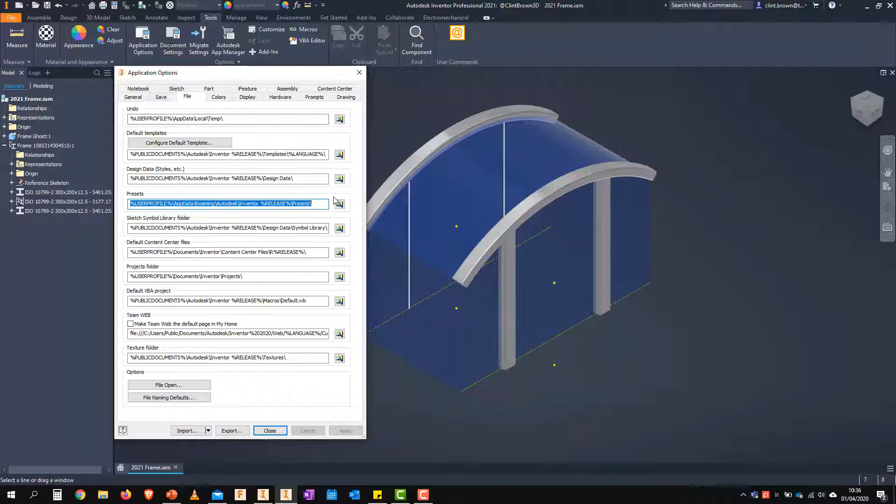The other thing to note while we're in here is that there's some file naming options. In 2021, we have full control over what we want to call our frames in this dialog, and we can even add in additional properties if we'd like to.

So let's jump back into the interface. First, what we can do is choose a frame size, and we can then add that as a preset. We can rename these presets as well. Once that's saved, it's added to our list.

If there's any presets we don't like, we can go to our settings and delete the current one, or whatever we've chosen, and those are removed from the list. We can also rename them. Something I quite like is you can use the property eyedropper to pick on a frame, and that'll load those specific settings. Once we've done that, we can add that to a preset as well.

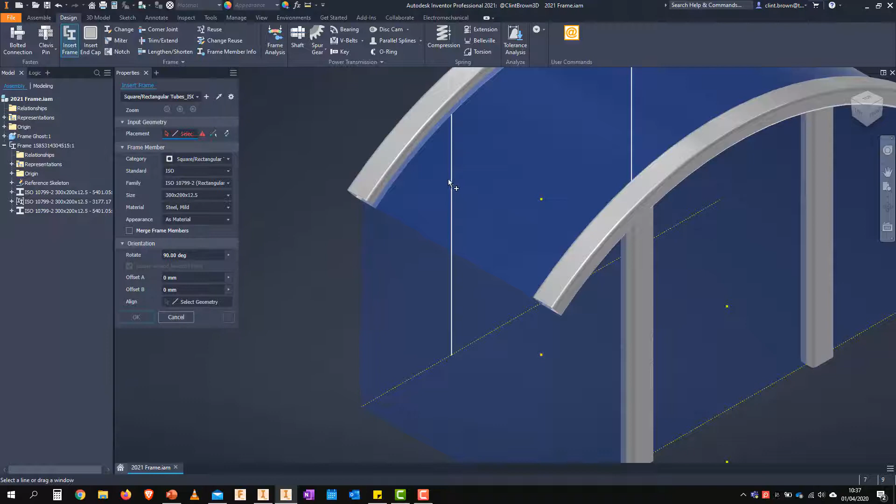So let's look at placing a frame. Click on an edge, and you'll notice that when we mouse over edges now, we actually start seeing the orientation in a little tooltip preview, which is really nice.

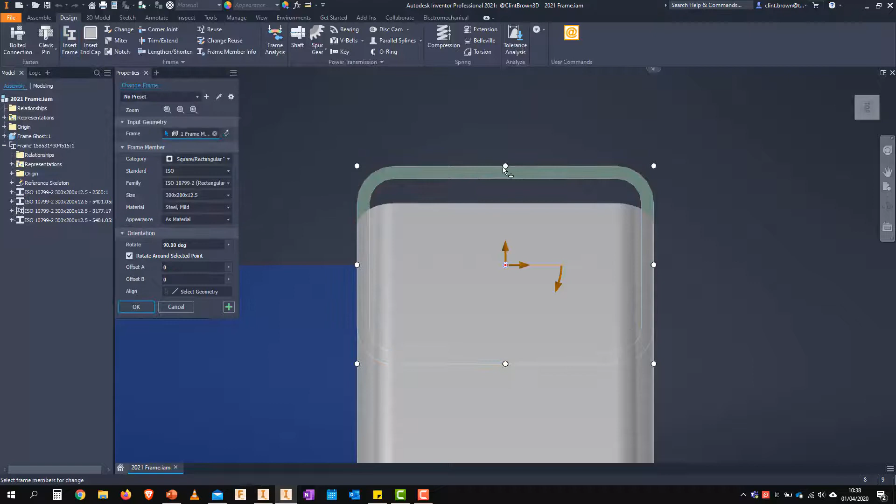Let's have a quick look at the new zoom tools. If we click on this button, it'll zoom us to the current orientation, which is really useful. You'll remember in the old interface we used to have buttons we could click to change our orientation. I can still affect my placement by clicking on the edges.

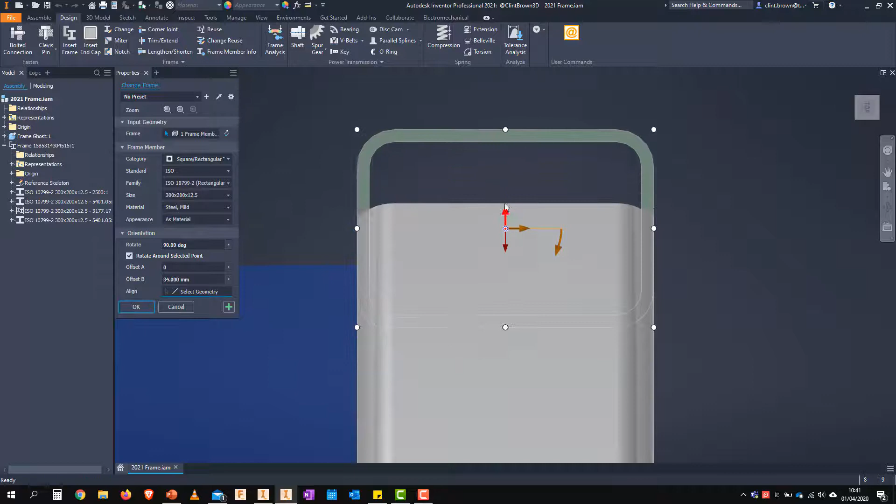We also have these grips available, and I can now rotate my frame around. They go in 5-degree increments, as you can see on the left. As I grab that, it rotates in 5-degree increments, and I can put in an exact figure. I can also drag my frames up and down for offsets, so I can see in real time what my changes look like before I commit, and I can type in figures as well to set those.

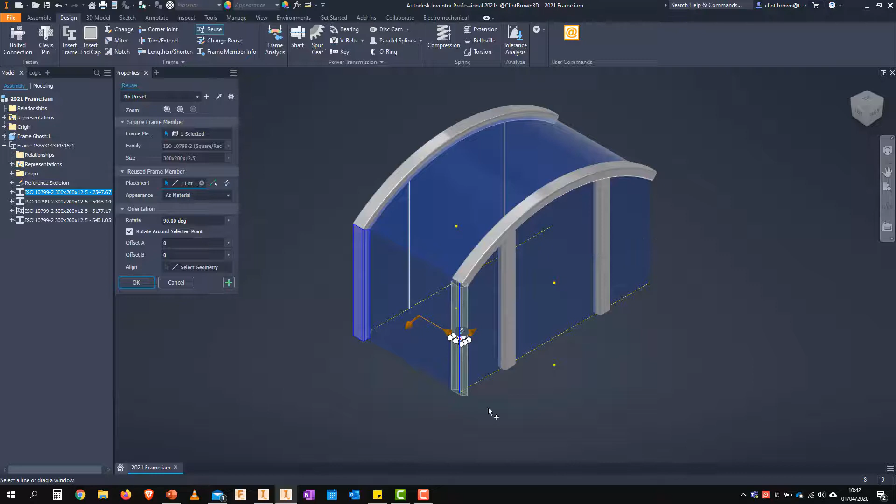We can also reuse a frame member. If I click on reuse, choose the frame member I want to reuse, then it's just a case of selecting where I want to put it. Now, because we've mitered this component, you'll see that this frame is coming in upside down, so I have a little flip ends toggle, and then I might want to drag that around 90 degrees so that the miter comes through.

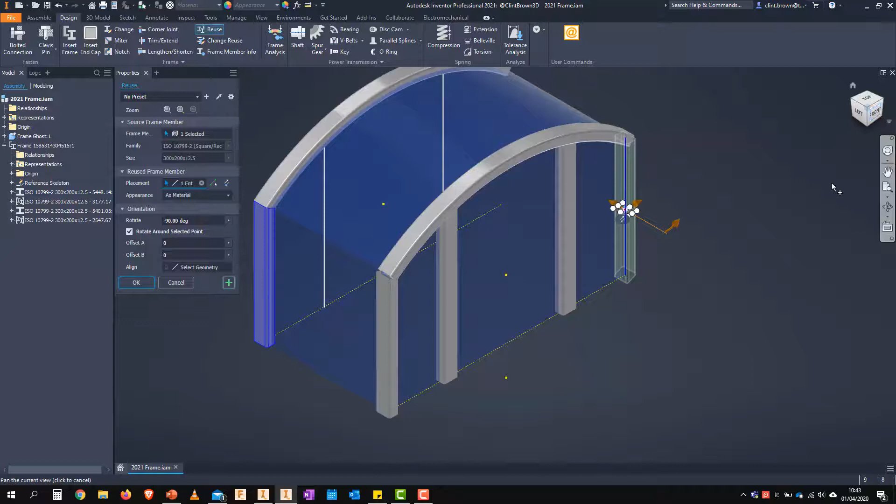So we'll apply that one, and then add in one on this end. Again, I might want to do something similar, so we go through and flip that, and then rotate it over 90 degrees. And the last one just needs to be rotated.

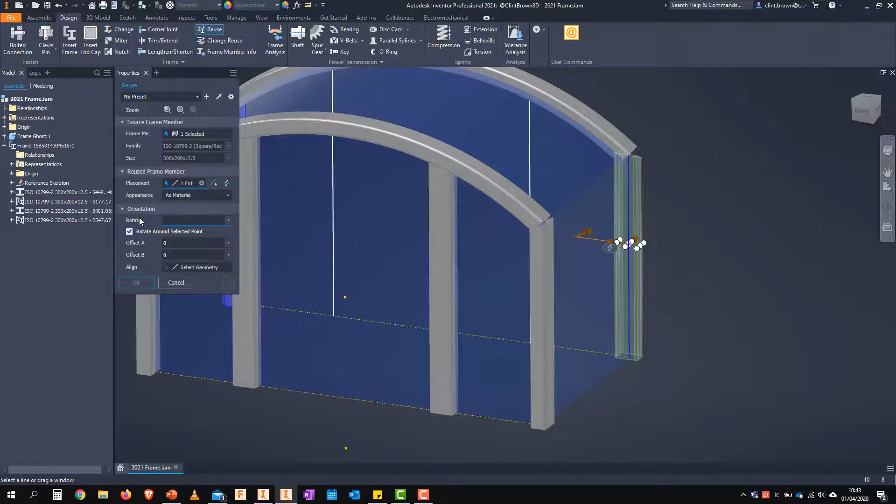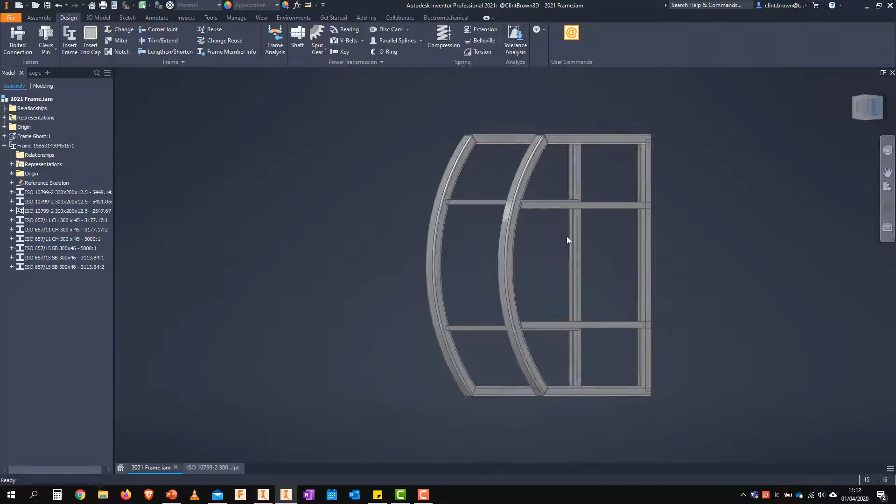So let's have a look at trimming back members to a curved surface. As before, slight interface change, but the workflow is exactly the same. What we'll notice now is that when we trim to that edge, we now have a straight cut. Let's have a look at the components. If we open that up, that edge is perfectly straight.

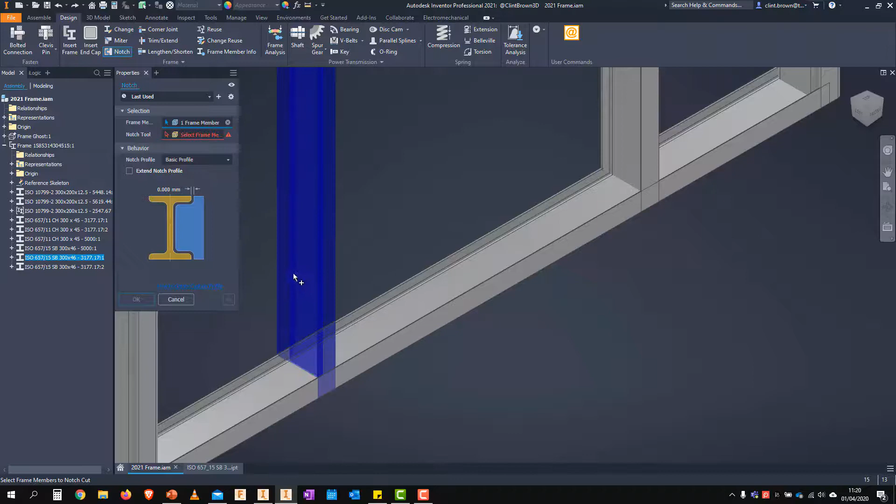Next up, we have notches. Our notch profiles have a slight change in the 2021 release. If we look at our notch tool, you'll see it's really intuitive. We've got blue and yellow shown here: blue is the frame members we want to notch, and our notch tool will be in yellow, which is this guy over here. We get a bit of a preview.

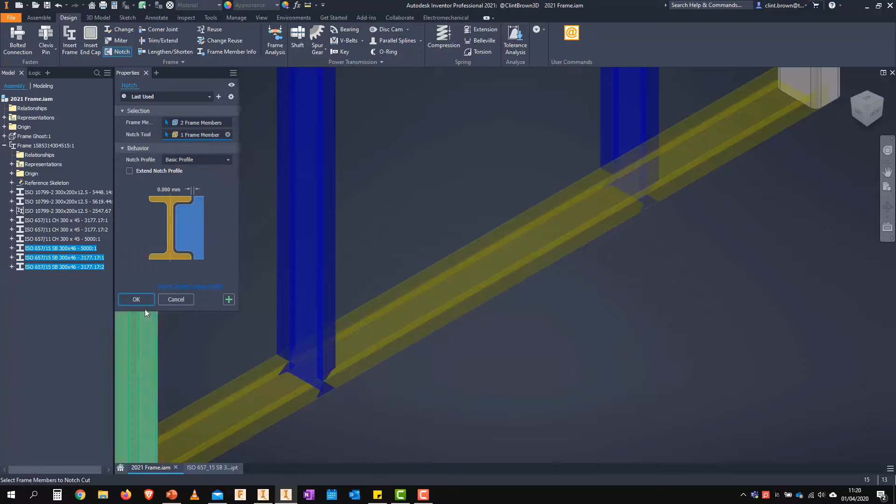Now what's interesting is we have the ability to edit a custom notch profile. This lets us go in and edit any of these numbers, so we can affect how the frame is trimmed back. There's even a help file to take us to creating our own custom profile. We can always flip that back to basic, say okay, and we can see that's nicely trimmed back and behaving as expected.

So that's it. 2021 has some great enhancements to the frame generator. Hope you enjoy using it.